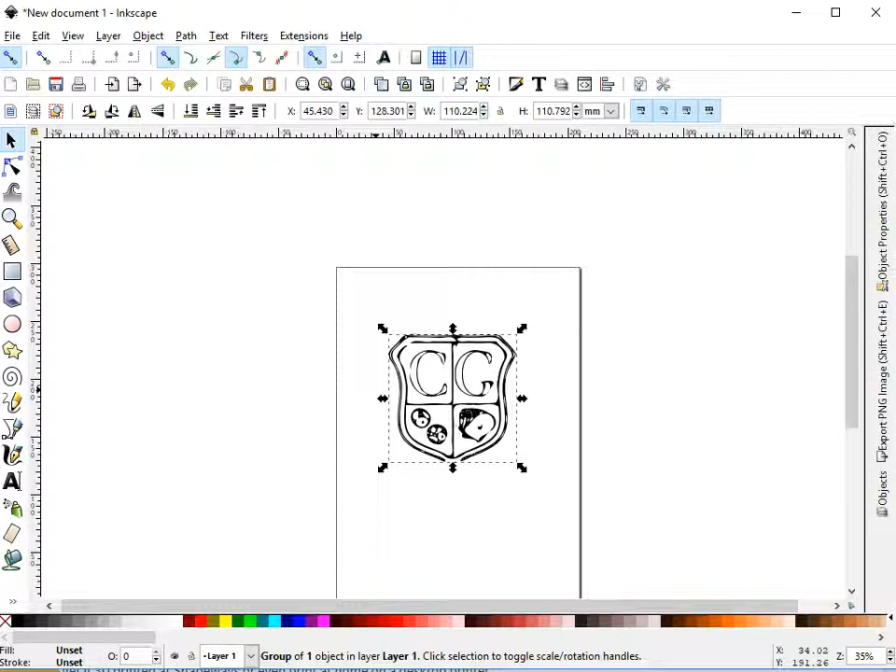But anyway, I tidied it up a little bit in Paintbrush, and then I opened it up in this program called Inkscape. And in Inkscape, I've been able to change it from a bitmap image into a vector, and I then saved that to my desktop with the name drawing. I'm not going to save it again. So it's now a vector image, an SVG file, which you say you already have.

What I can do then is to import it into this application that I've created called Fluid Designer for 3D Printing, which is based on Blender.

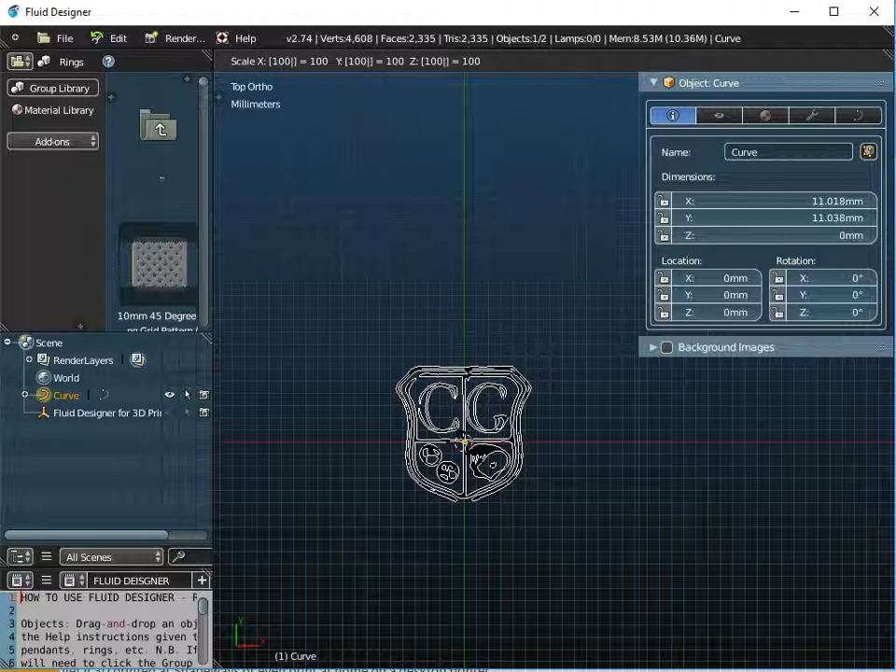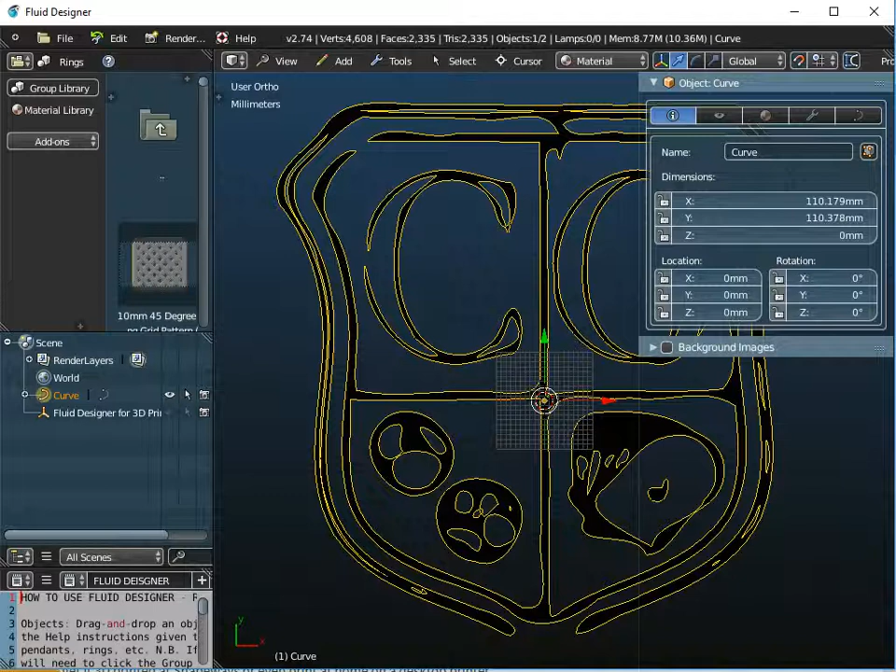Now what I want to do is to scale this object up. And we can do that by pressing S on the keyboard, S for scale, and I'm going to type in 100, and you can see it's getting bigger, so in my case I'm going to type in 10, and that gives me, if you look at the dimensions on the right of the screen there, 110 millimeters, which is kind of the size of your bed, but you can always scale it down to different dimensions. So I'm going to press the Enter key there. And I'm just going to press the Home key on my keyboard just to get the whole thing on the screen. So I've rescaled it to 110 millimeters by 110 millimeters.

Now whenever you scale like that, because this is a Bezier curve, you must always hold down the Control key and press A and apply the scale. If you don't do that, weird things are going to happen later.

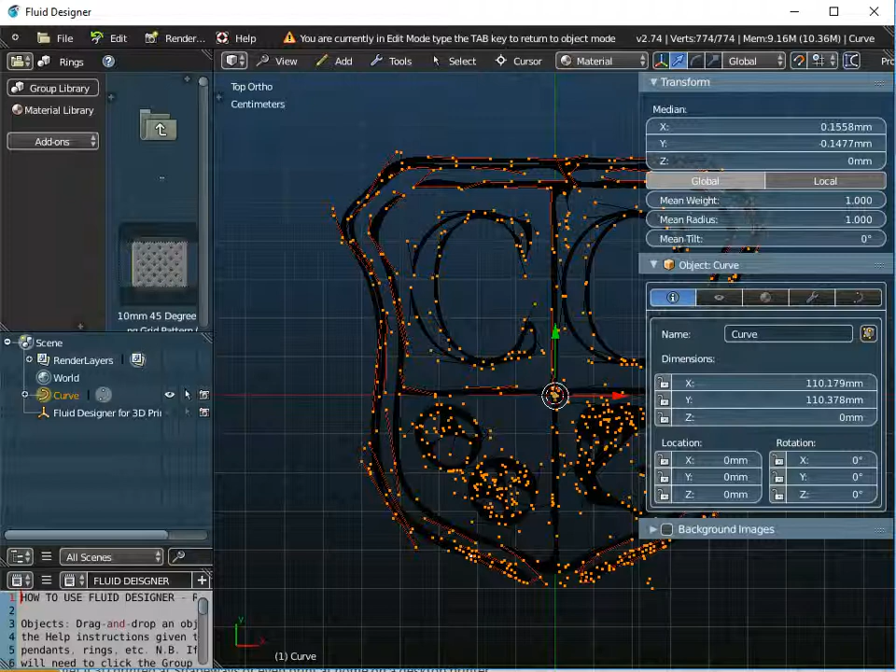Now what I need to do is to press the Tab key on the keyboard and press the A key to select all the control points. And over here I've got a mean weight and a mean radius. Now when I import it from Inkscape, these values are always a bit weird. I've scaled it to 100. These values should both be 1. Now if yours has not been created in Inkscape, you might not have this problem of setting these back to 1, but from my point of view, I always need to do that. Alright, so I'll press A on the keyboard to deselect all of those control points, and Tab on the keyboard to come out of edit mode.

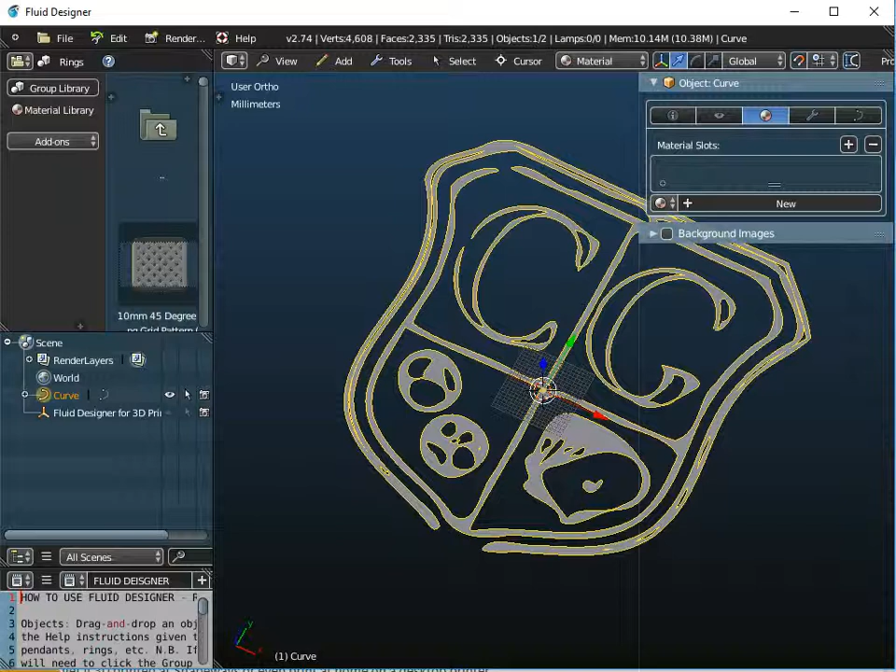Now there's a material slot here, which I'm just going to delete. That just takes that colour off it. It's not important from the point of view of 3D printing, but I'm used to working with the objects in grey. So this is now a Bezier curve, and all we need to do is extrude it. So if we go to the curve icon here in properties, and if I select extrude 1 millimeter, it actually creates a depth of 2 millimeters. It puts 1 millimeter above the grid and 1 millimeter below.

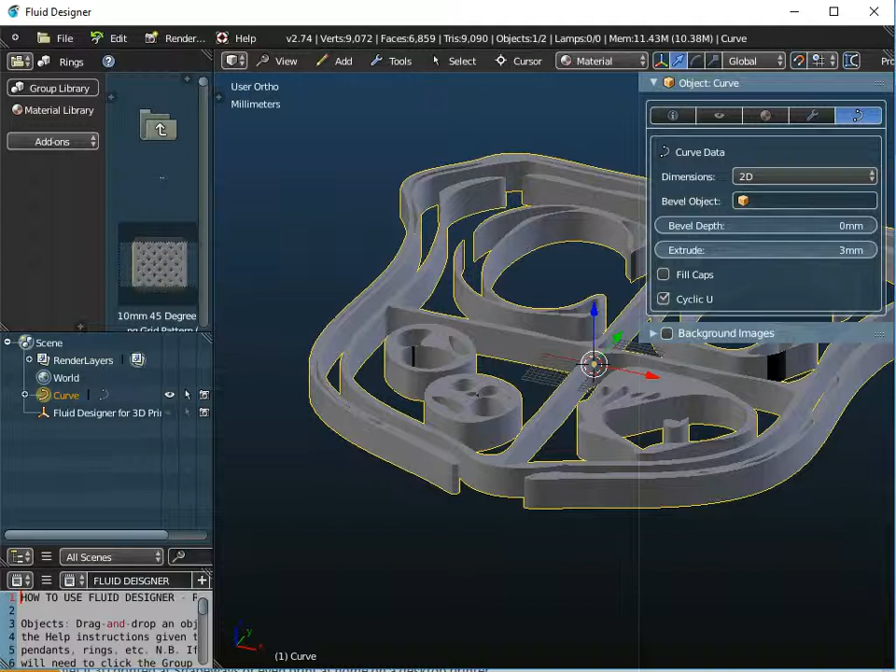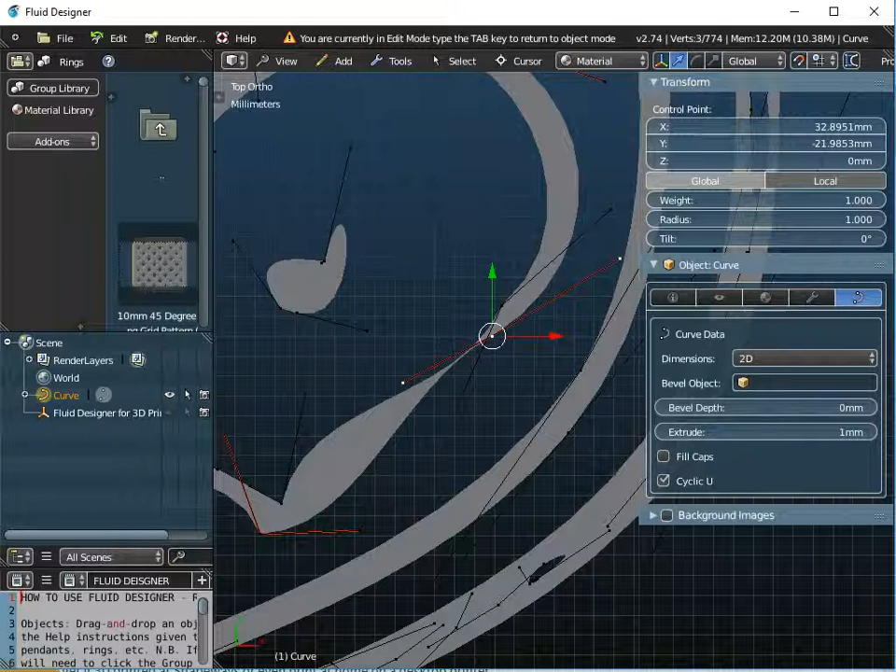Now that's not all you're going to have to do to sort this out to get it to 3D print. Because if I just go to view and top view, some of these places here are really thin. They're not going to 3D print. But if you press the Tab key on the keyboard and you click on a control point there, I'll just switch off the snap. If I just press G on the keyboard, you can see I can thicken up that area there.

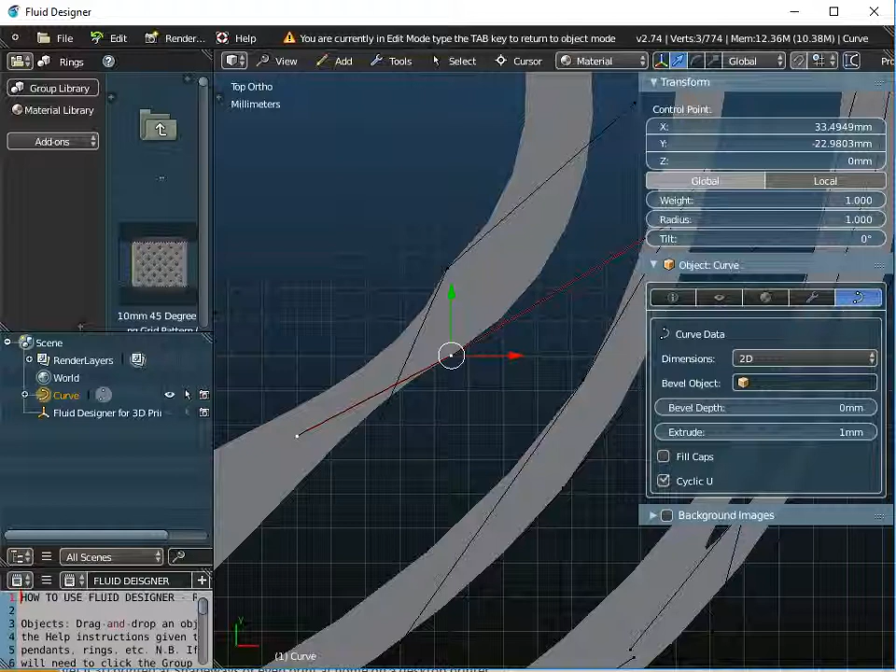So that was originally very, very thin. I need it to be more than 1 millimetre really. So if I use the ruler, you see that's about 1.6 millimetres. So I could make it a little bit thinner. So I'm just using the ruler here to measure the thickness. But I'm afraid you're going to have to do that all the way around the object here.

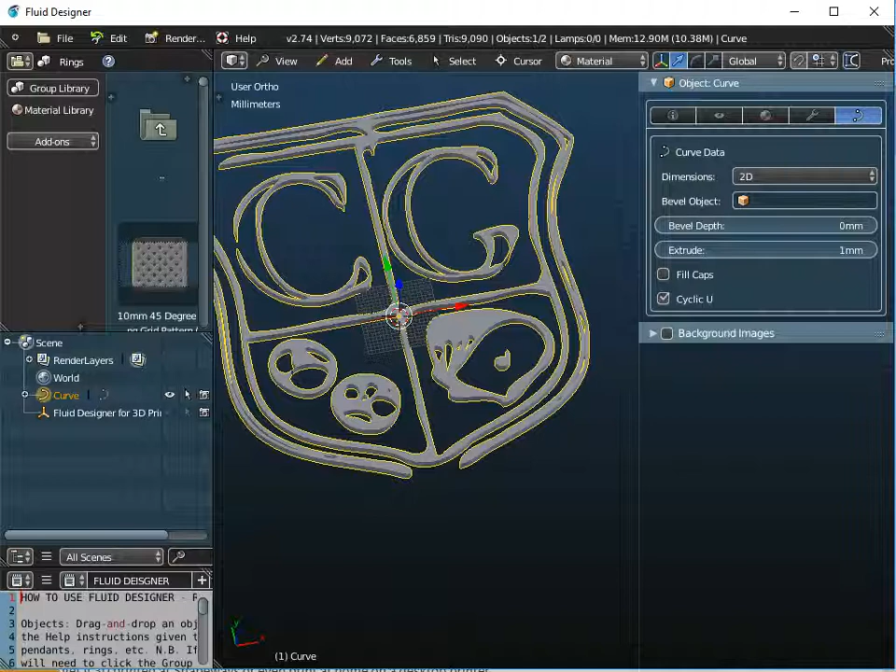And in some cases like this one here, you're going to have to highlight those, and X on the keyboard will delete those unnecessary control points there. So this is actually a Bezier curve, X, and that will delete. Alright, so that's a Bezier curve which will 3D print.

But then again, you do have to take into account that these objects are kind of sat on their own in the middle there. So you might want to put an object underneath it and put it on top to really make it 3D printable. Alright, so that's how I did it anyway.